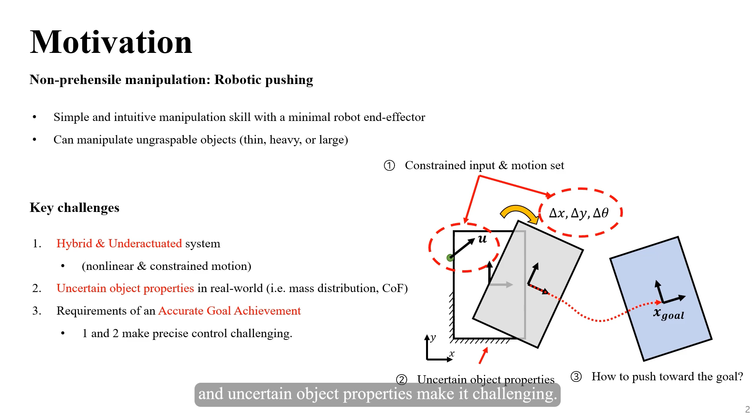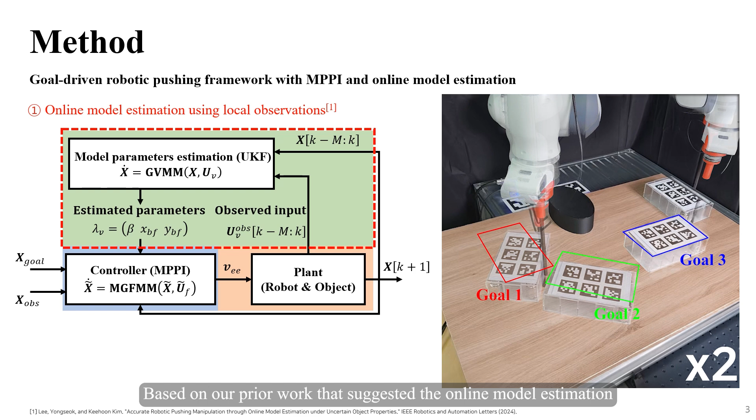In this paper, we proposed a goal-driven robotic pushing framework that can operate under uncertain object properties and without any predefined pushing trajectories. Based on our prior work that suggested the online model estimation to handle the uncertain object properties in practice, we employed the model predictive path integral as a goal-driven controller with a modified version of the generalized force motion model.

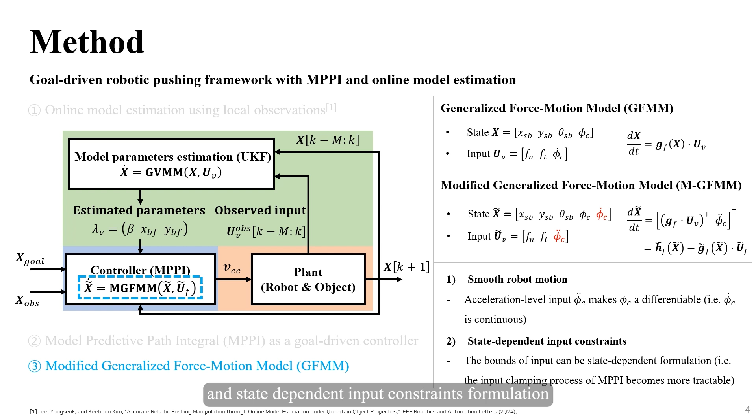The modified generalized force motion model is an extended version of the generalized force motion model in that the robot's motion is extended from a single integrator into a double integrator. Through this modification, we can achieve smoother robot motion and a state-dependent input constraints formulation that makes the input clamping process more tractable. Also, we employed the model predictive path integral as a goal-driven controller with the following cost function and input clamping processes.

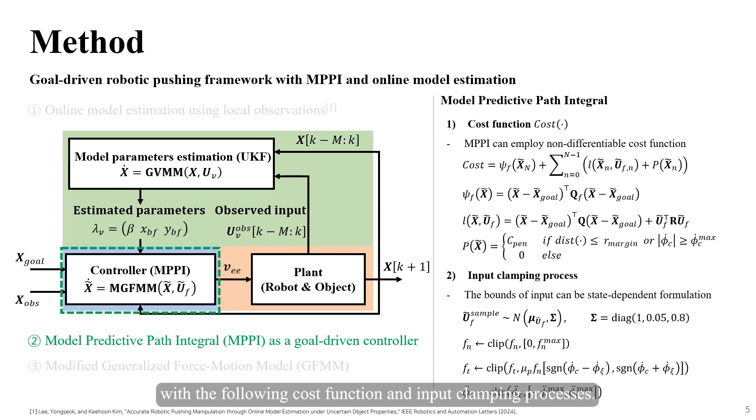To show the feasibility of the proposed goal-driven robotic pushing framework, we first performed comprehensive numerical experiments in two scenarios, known parameters and unknown parameters. The three distinct pushing tasks were performed with three different object shapes, and we reported the total trajectory length, task success rate, and total simulation step as a performance index.

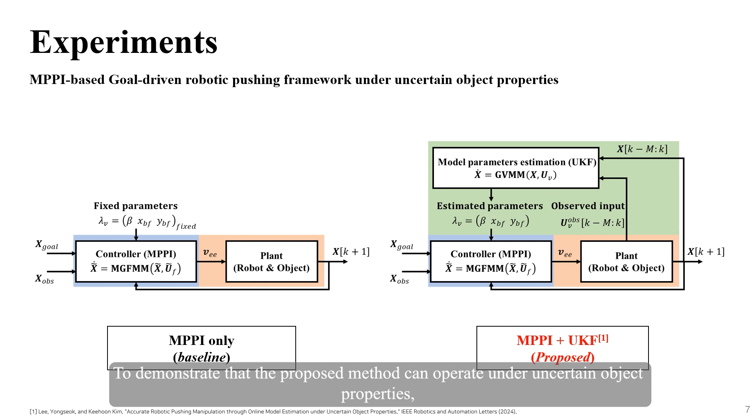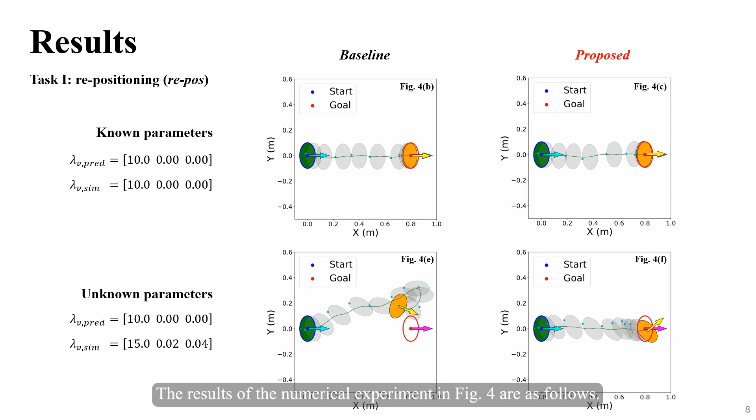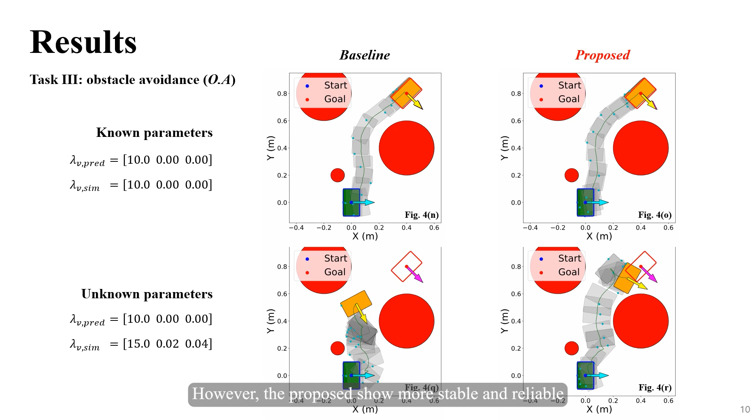To demonstrate that the proposed method can operate under uncertain object properties, we compared the proposed method, which combined MPPI and a UKF-based model estimation process, against MPPI without model estimation as a baseline. The results of the numerical experiment in Figure 4 are as follows. As shown in these videos, the MPPI-based goal-driven pushing controller can push the object toward the goal state in known parameter scenarios. However, the proposed method shows more stable and reliable pushing motion than the baseline in unknown parameter scenarios.

Through the numerical experiments, we verified that the proposed and baseline did not show significant differences in known parameter scenarios, while the proposed outperformed in unknown parameter scenarios. It implies that the proposed MPPI-based pushing controller can work well as a goal-driven controller, and the UKF-based online model estimation process is necessary to overcome the uncertain object properties.

Also, we computed the offline generated optimal pushing trajectory using a full-time prediction horizon MPC. Although it can generate more length-optimal trajectories, it is an offline process and only valid if the model parameters are exact.

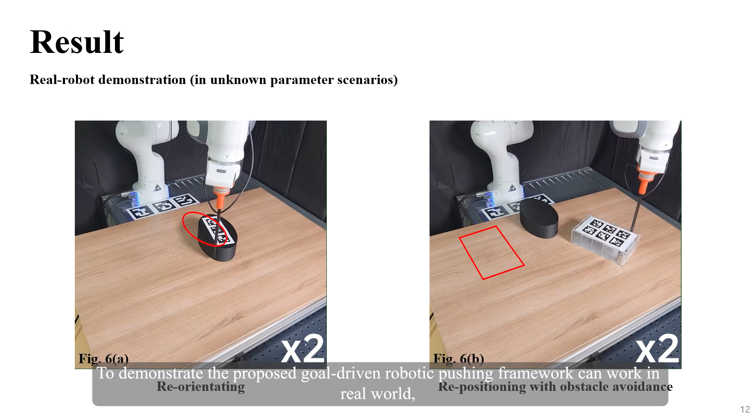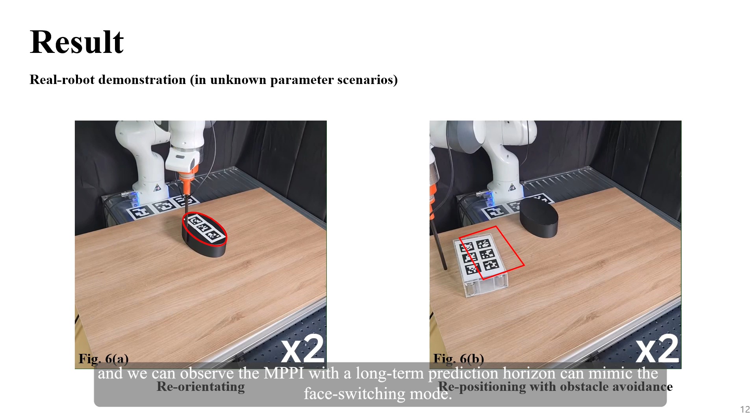To demonstrate the proposed goal-driven robotic pushing framework can work in the real world, we also performed a real robot demonstration with two pushing tasks under unknown parameter scenarios. As shown in these videos, the proposed method also worked well in the real world, and we can observe that MPPI with a long-term prediction horizon can mimic the face-switching mode. In conclusion, the contributions of our work are as follows.